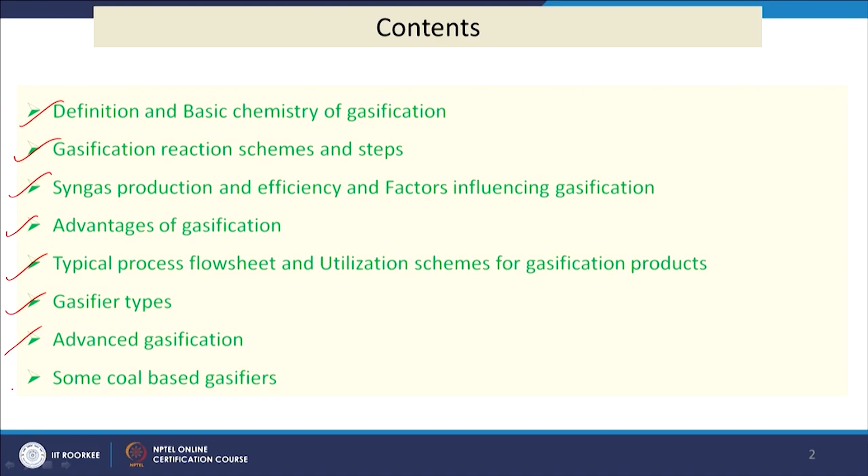Now, we will see what is gasification. As we have discussed in the introductory module in the previous class, gasification is the process which uses a controlled amount of oxygen and converts carbonaceous materials into carbon monoxide and hydrogen rich gas, that is called syngas. In this process sometimes steam is used.

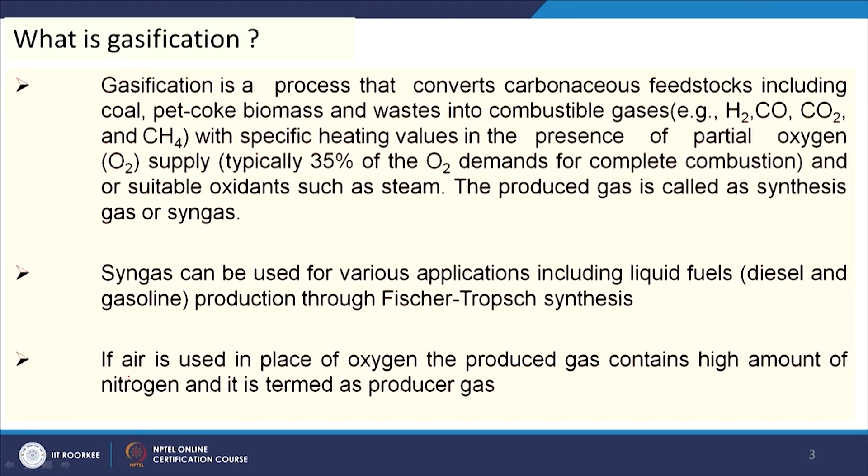For coal steam is used, but for biomass the steam requirement may be very less, because coal is having more carbon. So, steam is required for this process with the coal, and this syngas can be used for various applications, including liquid fuel production through the Fischer-Tropsch synthesis. And if air is used in this process in place of oxygen, then the syngas contains more nitrogen, and that is called producer gas.

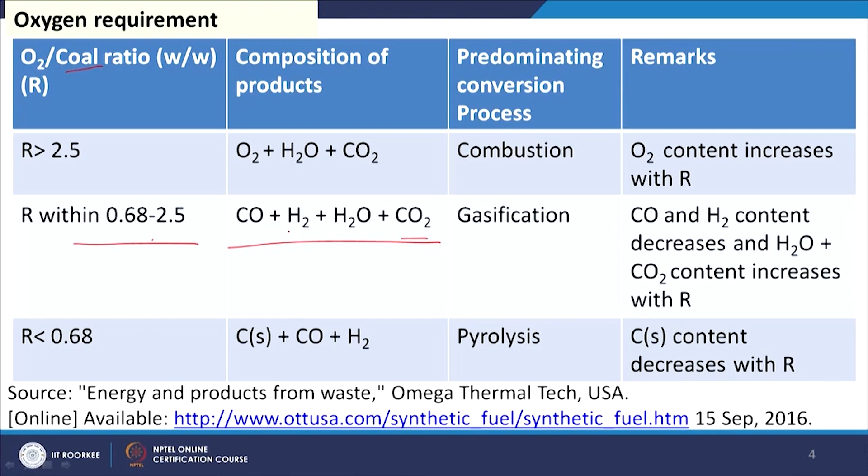As we have already discussed in the previous class, the oxygen to coal ratio for gasification is within 0.68 to 2.5, and in this case these are the products. If we increase the R, we will be getting more CO2, and if we reduce the R value, we will get more CO and H2. So, this is the basics of the gasification process.

Now, we will see the chemistry, what type of reactions take place in the gasification process. So, we have here feedstock coal, we have oxygen and we have steam. These schemes show us elemental reactions. The coal is having carbon, hydrogen, oxygen, sulfur, nitrogen, etc., but we are considering the major component of the coal, that is carbon.

So, the first reaction, carbon plus half O2, a controlled amount of oxygen, gives CO; we are terming it gasification with oxygen. The heating value is minus 110.5 kilojoule per mole. Combustion with oxygen can take place, C plus O2 gives CO2. This is again an exothermic reaction. So, these two exothermic reactions provide the heat which is required for other reactions, say gasification with carbon dioxide, C plus CO2.

That gives 2CO, which is an endothermic reaction, and C plus H2O will also give us CO plus H2, again endothermic. Gasification with hydrogen is exothermic, but this heat is very less: C plus 2H2 gives CH4. At the same time, under the same condition, the water gas shift reaction takes place, CO plus H2O reacts to form H2 plus CO2, and some methanation also takes place, CO plus 3H2 gives CH4 plus H2O. These two reactions are also exothermic in nature.

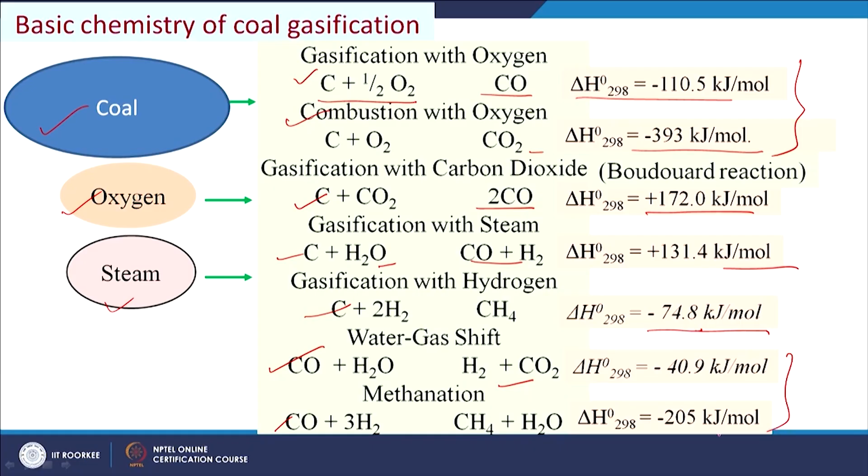So, overall it is having both exothermic and endothermic reactions. Initially we need to provide oxygen, and the energy released from those reactions will be used for these reactions.

Now, what is the composition of the syngas and producer gas? Here hydrogen, CO, CO2, CH4 ranges are provided. Hydrogen is 20 to 30% for syngas and 13 to 19% for producer gas, CO 40 to 60% for syngas and 18 to 22% for producer gas, CO2 5 to 15% for syngas and 9 to 12% for producer gas, and CH4 0 to 5% for syngas and 1 to 5% for producer gas.

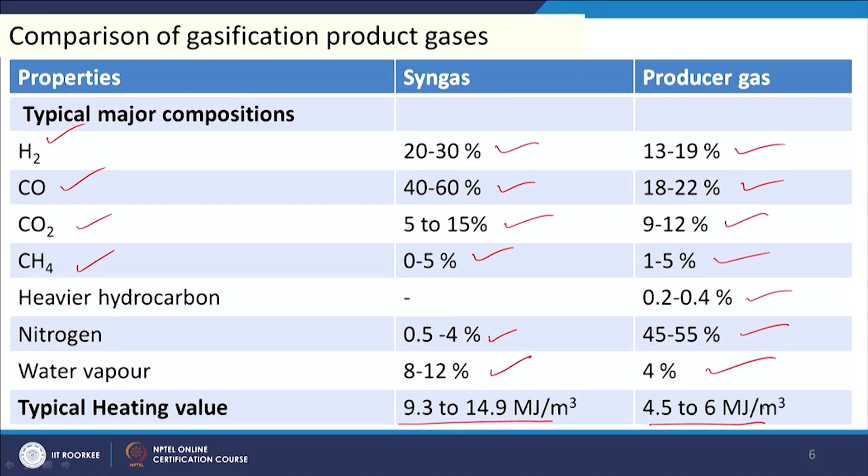Heavier hydrocarbons may be present, and nitrogen is 0.5 to 4% in syngas and 45 to 55% here. Water vapor is 8 to 12% for syngas and 4% for producer gas. Now, the heating value, which is most important in our case: for syngas it is 9.3 to 14.9 megajoule per meter cube, whereas it is 4.5 to 6 megajoule per meter cube for producer gas.

Now, we will see the mechanism of gasification, how the gasification takes place.

If we apply heat and a controlled amount of oxygen, then what type of changes are going to take place? So, if we have feedstock, initially you are heating. Then there will be char and volatiles formation; volatiles will be going off. Those volatiles will be further gasified, char will be further gasified, and ultimately it will give us syngas.

Now, we will try to understand more about the mechanism. So, this is the gasifier: we are putting feed here and oxygen or air and steam here. Gradually feed is getting down and gas goes up. Here is a grate. Solids are falling and getting in contact with hot gases, different types of changes are going on, and ultimately ash is formed and stored on this grate or passed through the opening of the grate, and here ash collection takes place.

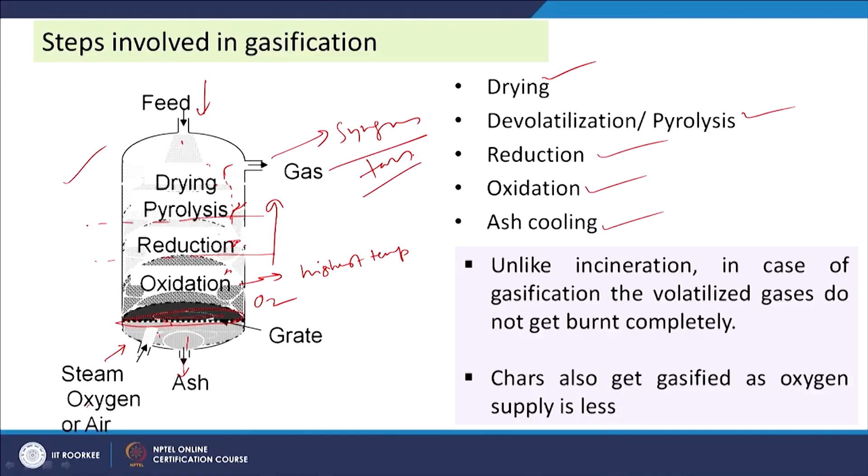Now, we will discuss syngas production and efficiency. What is the syngas production? What will be the fuel gas production or syngas production?

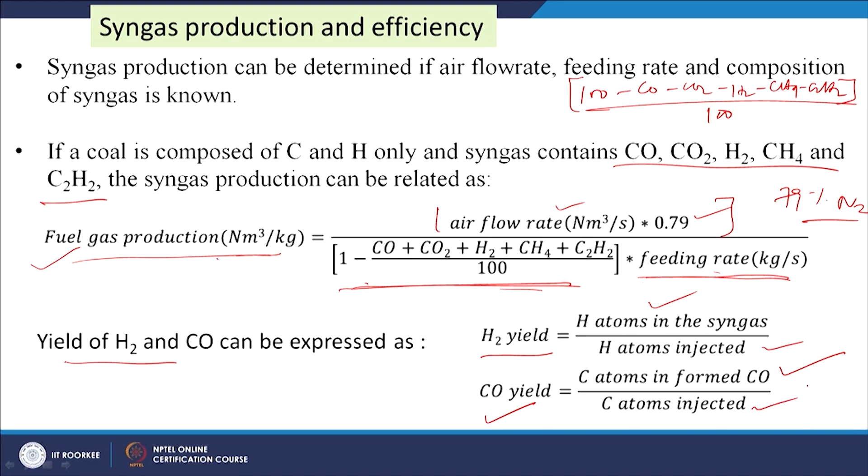The conversion efficiency of a thermal power plant is between 30% and 40% for a single cycle steam power plant, as we discussed in our previous class, and this can be increased up to 60% for a combined cycle gas turbine power plant. We have also seen that the thermodynamic limit is about 63% efficiency.

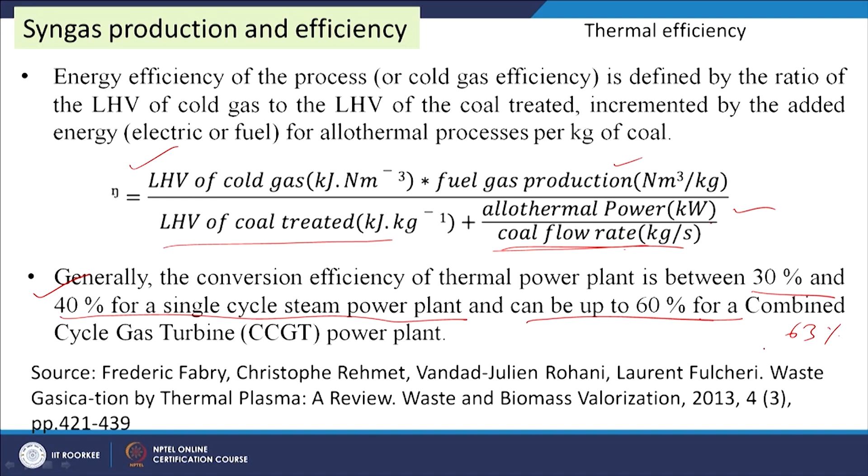Now, we will see the factors which influence the gasification process. The type of feed injection: coal may be top fed or side fed. If we change the coal feed position, the efficiency will change, because it gets a different time in contact with the hot gas. And the gasification agent: air or oxygen may be used. As we discussed, if we use air, more nitrogen will be in the syngas, resulting in producer gas, and the energy value will also be less.

The type of heating: it can be done either by partial combustion of the coal in the gasifier directly, or from an external source, so indirect heating is also possible. In both cases efficiency will change. And the temperature range used in the gasification reactor will also influence the performance, as will the pressure range under which the gasifiers are operated. These are different parameters which influence the performance of the gasification process.

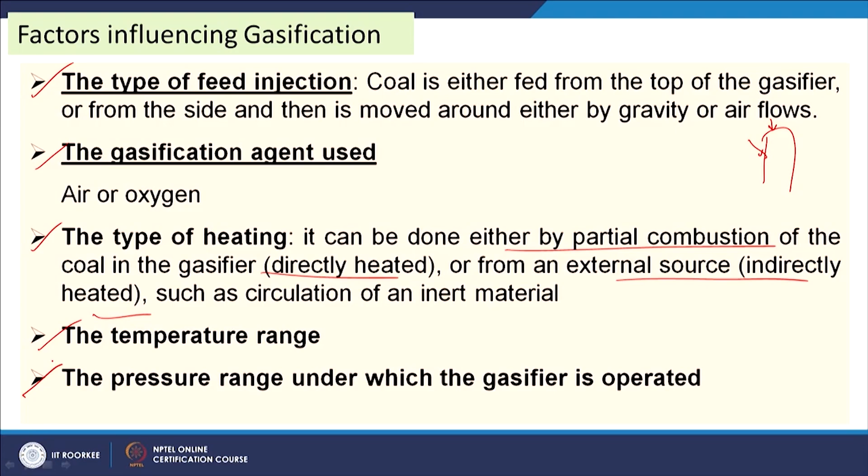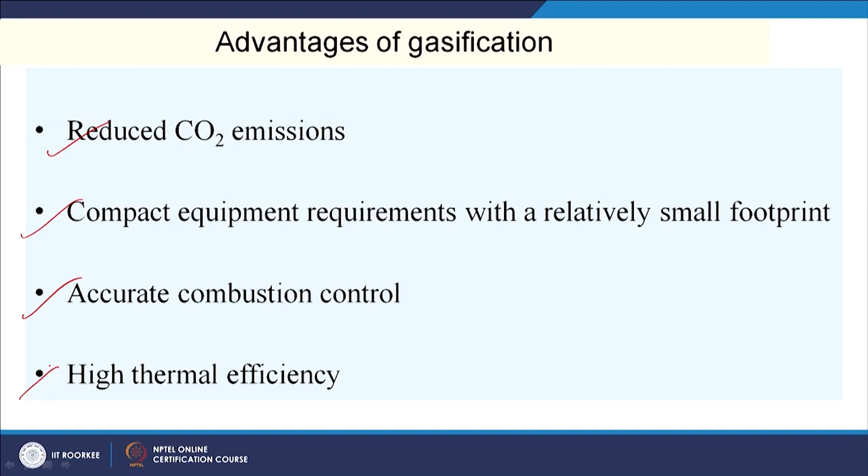Different types of gasifiers have been tested, developed and used for coal gasification, and different efficiencies have been achieved. Now, what are the advantages of this process? It reduces carbon dioxide emission, as complete combustion is not taking place, compared with the combustion method. The equipment is compact with a relatively small footprint. Then, accurate combustion control, as we provide a controlled amount of oxygen, and high thermal efficiency, more than the combustion process.

Now, we will see how we will use this: the flow sheet and utilization schemes of gasification products. So, we have coal here, then we are sending it to the gasifier with steam and oxygen, then we will get syngas. So, syngas has to be cleaned up first. In the first stage of cleaning, we are removing the particulates here, and in the second stage of cleaning we are removing the sulfur here, then it is coming as a pure syngas, and there will be some conditioning and then utilization.

So, we can go for processing, that is liquid fuels and chemical synthesis. We can separate the hydrogen from the syngas, and hydrogen can be used as vehicle fuel. Hydrogen can be used in fuel cells for electric power, or syngas can be sent to a gas turbine. So, it will be electrical power production.

And then gas turbine exhaust can further be heated by using some additional fuel, and then it can be sent to a waste heat boiler, and steam can be produced and electricity can be generated from the steam turbine, and the steam from the boiler can be passed here for the gasification, and at the bottom what we will get is ash, that will be slag or metal recovery.

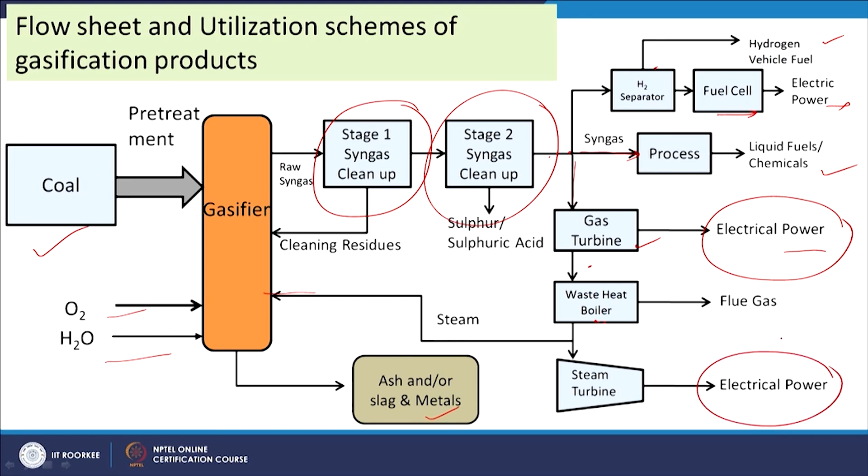So, these are the different processes or schemes which can be used for the utilization of products of the gasification process. So, apart from electricity generation, we have a number of opportunities to utilize the products generated through gasification. So, we will have more opportunity to make the process more economic, and the polygeneration option is utilized and recommended for application.

Now, we will see major types of gasifiers for coal gasification. So, on the basis of the feed, inlet, gas collection and the operating conditions, different types of gasifiers are reported. Out of these, moving bed, fluidized bed and entrained bed are the three major gasifiers which have been used widely for the gasification of coal and other carbonaceous feedstocks.

In the moving bed, coal is fed at the top and the particle size is higher, say 5 to 50 millimeter. So, it falls from the top and from the bottom oxygen, air and steam are sent. So, reaction takes place as I have discussed in the previous slide also. So, gradually it falls and ash gets out from the bottom.

So, if we see the temperature profile across the height of the gasifier, then this will be the nature. If we increase the height from the bottom, gradually temperature will increase and reach its maximum, then again it is decreased, because oxidation is taking place at the middle. So, that has the maximum temperature, around 1800 degree centigrade.

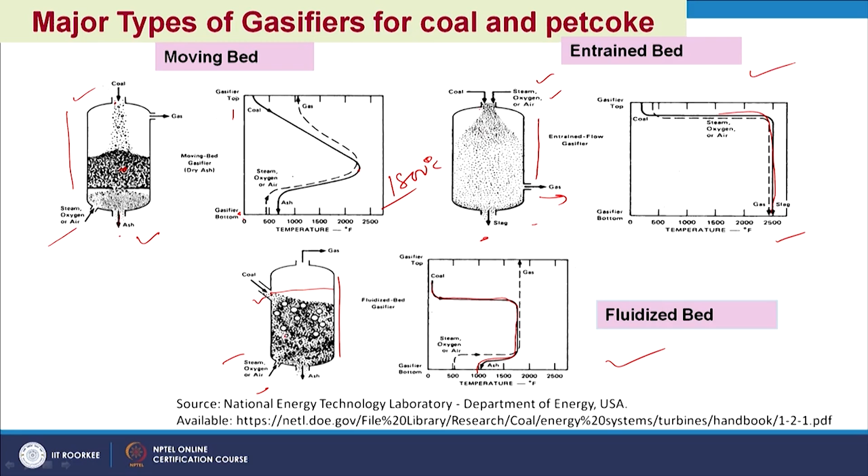But these fluidized bed gasifiers have some advantage, that they can capture sulfur in situ. So, that is why the transport reactor gasifier has been developed by KBR. In this case we have intermediate properties; both the fluidized bed and entrained bed properties are available here. How? We are putting in fuel, then adsorbent to capture the sulfur, and then oxygen or air and steam, all coming into this reactor.

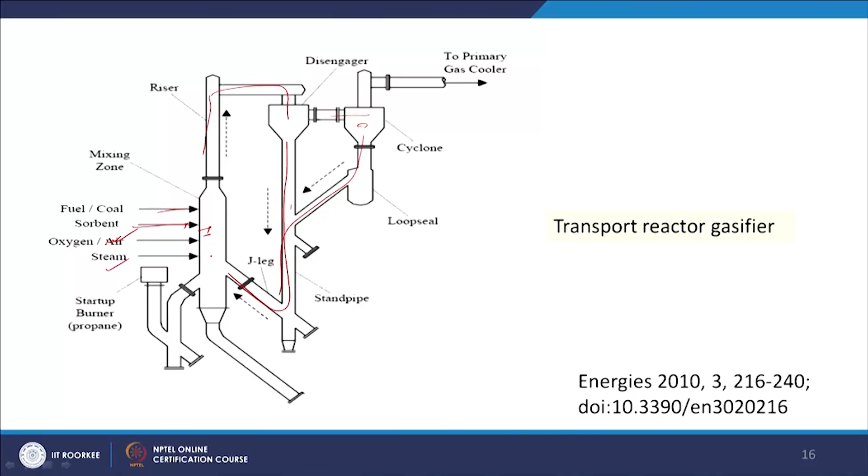Then it is going up this riser section, getting very small contact time, then it is falling again and the gas is coming here, particulate separation, and it is coming back. So, that way we are getting the benefits of the fluidized bed and the benefits of the entrained bed. Both features are available in the transport reactor. In this case we do not need to use particles as fine as those of the entrained bed.

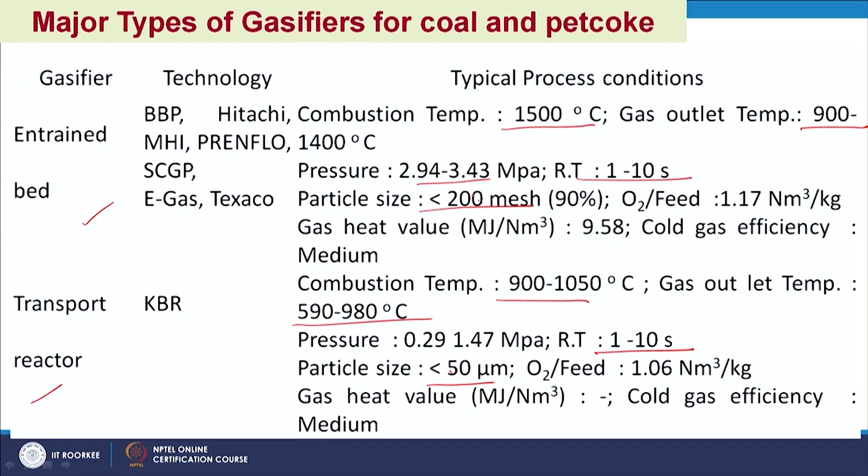Now, we see the transport reactor; it is in between. Temperature is 900 to 1050 degree centigrade, gas outlet temperature 590 to 980, and residence time 1 to 10 seconds, just like the entrained bed, and size is less than 50 microns. So, we do not need 200 mesh, that means 70 microns; it is having 50 micron size.

Now, we will see the advanced processes in gasification. Plasma gasification is one of the advancements in the gasification process. In this case, we use high voltage across two electrodes. Electrons are emitted, the electrodes accelerate free electrons, and free electrons help to ionize adjacent atoms and molecules, and then a number of electrons are produced which form an avalanche, called a streamer. So, that is called the plasma.

In this case, torch power levels range from 100 kilowatt to 200 megawatt and produce energy densities up to 100 megawatt per meter cube. Different free radicals are formed which convert the different components present in the coal to their oxidized form. So, C is converted to CO2, H to H2O, N to NO2, S to SO2. But typically it has been shown that CO and H2 gas remain in higher concentration.

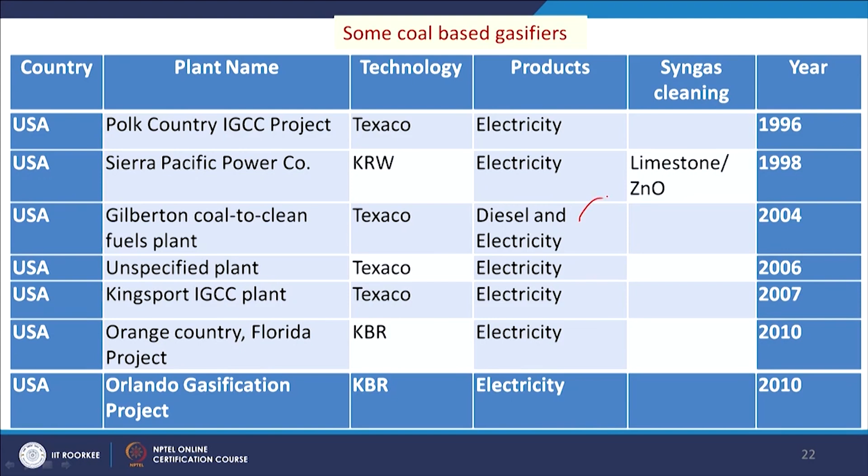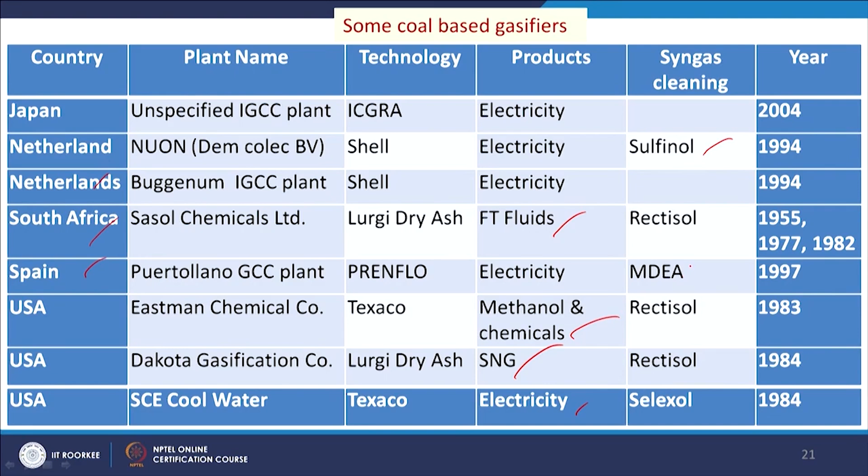Some diesel and electricity is also produced by some plants, and different types of cleaning options are also used: Rectisol, Sulfinol, MDEA, etc. I will discuss this in the next class.